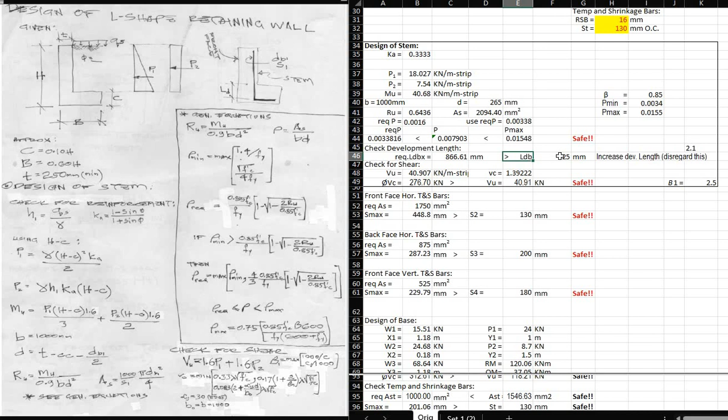That is equal to C minus clear cover. And then, ang required LDB or required development length is ito. So, general equations for required development length.

Pero, ang involved dito na bar diameter is DB1. Ngayon, ito siya, it is among 4 equations. Mapapansin nyo, nakalink siya dito sa diameter of bar 1.

Okay, so the required development length is 866. Ang actual is 325 only. Kaya, fail. Ibig sabihin, etong nakabaon dito sa footing is kulang. Kaya, i-extend mo yan, pag ganyan, para mag-increase lang yung kanyang development length.

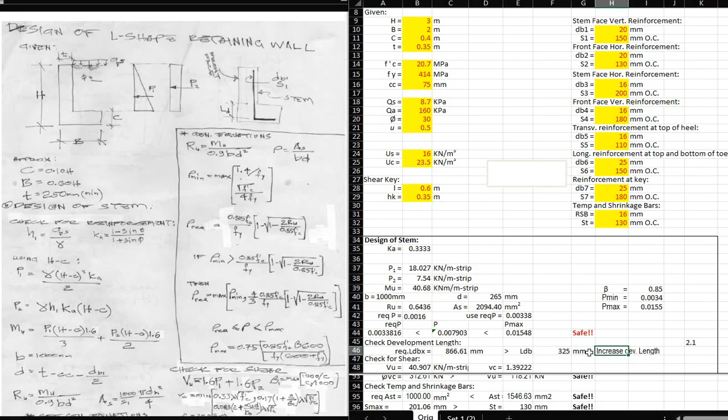Ayan, so increased development length. However, di ko na nilagay dito yung new development length considering yung increase. So, bahala na kayo dyan.

And then next is check for shear. Ngayon, dito sa contact between or the line between the stem and the footing, magkakaroon dyan ng possible shear failure. And then, ang shear force would be obviously P1 plus P2, tapos ang resisting shear force would be phi VC.

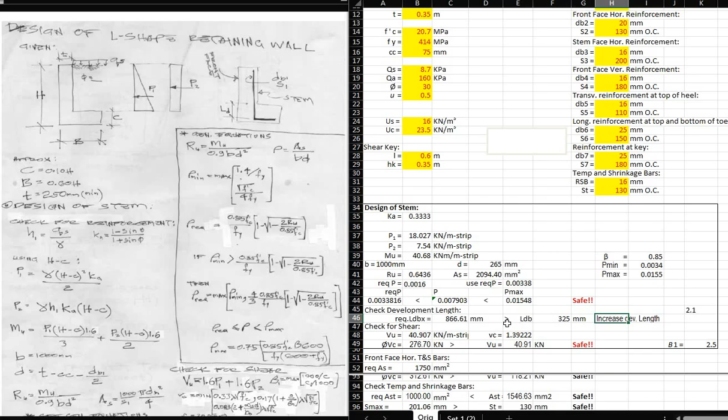Yan yung shear force contributed by the concrete section, which now brings us to this equation. So your shear force is 1.6 times P1 plus 1.6 times P2, which is equal to 40.91 kilonewton.

And then, yung VC natin, ito, which is defined by 1, 2, 3 equations. Okay, so ayan, minimum of 0.33 lambda square root of F prime C, and then 0.17 times this quantity times lambda square root of F prime C. And then, itong beta 1, ito siya.

Beta 1 is the maximum of 1,000 divided by C all over C divided by 1,000, which is 2.5. And then, ang B sub O niya would be 1,000 or meter strip. So we can, and then ang effective depth D niya is nakalink dito sa effective depth D na ginamit natin sa check ng bakal.

Okay, so your phi VC now or shear strength is 0.75 times small VC times 1,000 times D na 265. And your allowable is 276, which is greater than VU. So therefore, it is now safe.

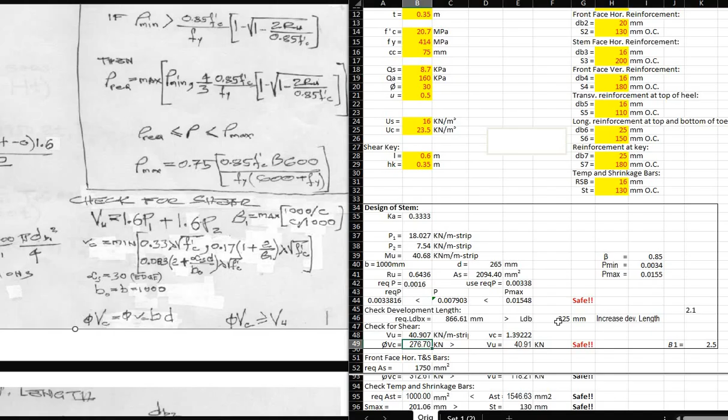After that, punta na tayo sa front horizontal temperature and shrinkage bars. Ito, front face horizontal temperature and shrinkage bars. This is actually front face horizontal reinforcement. Mapapansin nyo, ayan o, S sub 2 and then S sub 2 rin dito.

Actually, ito, hindi siya designed as reinforcement. It is designed as temperature and shrinkage bars. Kasi pag sinabi mong designed as reinforcement, ibig sabihin nun, mag-determine ka ng moment, magde-determine ka ng rho max, rho min support, and so on. Pero ang ginamit lang natin dito ay 0.0025. So this is temperature and shrinkage bars.

However, dito nilagay ko na lang siya na horizontal reinforcement kasi 20 mm ang ginamit natin. And normally, ang temperature and shrinkage bars ay nasa 10 mm tsaka 12 mm lang. Pero since 20 mm na, 16 mm, and then it's okay, nasabihin ko na lang na reinforcement siya.

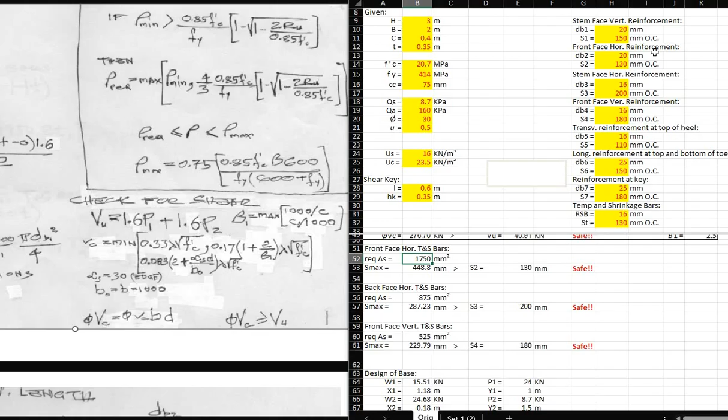So, dito, ang required AS niya ay 2/3 times 0.0025 HT, which is this one. 2 all over 3 times 0.0025 times H times T. And then, ang maximum spacing is based on this AS required.

It is based on 450, 2T, and this equation. Ngayon, ang gagamitin nating diameter of bar dito ay DB2, which is actually ito. Okay? So, that's how you get S max. And then, you compare it with S2 na 130. So, if S sub 2 is lesser than maximum S, then it is safe.

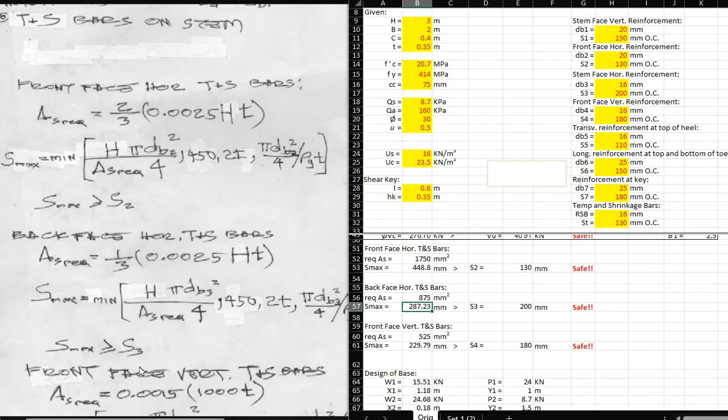After which, dito na tayo ngayon sa stem face horizontal rebars or S3 and DB3. So, back face horizontal temperature and shrinkage bars, your AS required is 1/3 of 0.0025 HT. And then, ang Smax again, the same equation, pero ang gagamitin natin dito ay dB3. Yan, so nakalink ito ngayon, maximum S dito kay dB3.

And then, ang S3 natin ay 200. So, therefore, it is safe again.

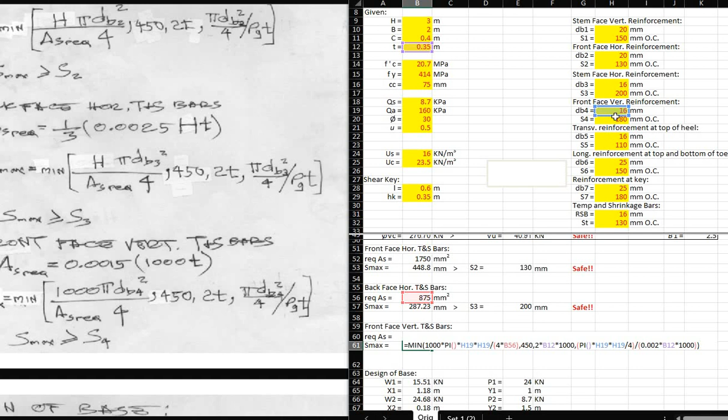And then, finally, dito sa dB4 and S4, yan na. Ang kanyang AS required ay 0.0015 times 1,000 of T. And ang kanyang Smax ay dependent again dito sa AS required, tsaka yung dB4. Okay, and spacing of dB4 is 180 mm.

Next, we now go to design of base. For the design of base, ang kino-consider natin ngayon dito ay yung 3 modes of failure, which is overturning, sliding, tsaka yung bearing. And then yung structural, yung mode of failure number 4, yan yung ginawa natin dito sa design of stem, so forth and so on, and then design of heel, so forth and so on.

Okay, so dito sa design of base, same procedure yung ginawa natin sa gravity retaining wall tsaka sa cantilever retaining wall. Okay, so dito, i-compute natin yung mga gravity forces which are W1, W2, W3, and then W4, tsaka yung mga lateral forces which is P1 and P2.

So, for this W1, here it is. This is B minus T times capital C times unit weight of concrete. And then, X1, that is from the...

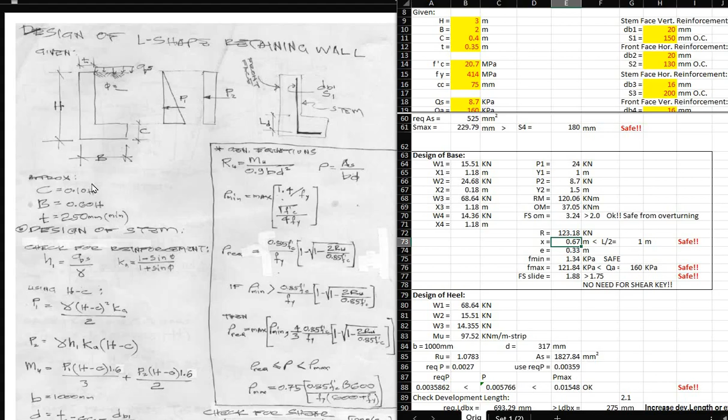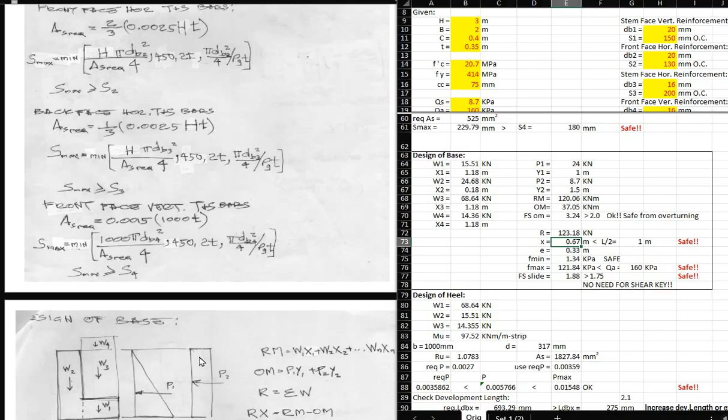That's the middle of the base, okay? It should not exceed this halfway point, otherwise there is a possibility of getting a negative pressure. Okay, so let's go back. So this is x, Rm minus OM divided by the reaction, and it is less than L over 2.

Next, let us now solve for eccentricity E. Eccentricity E is b over 2 minus x, which is 0.33. And then from there, we can solve for the minimum and maximum soil pressure.

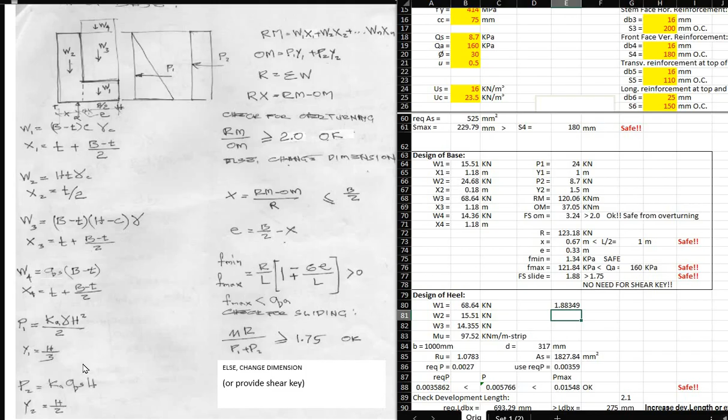Now, if it's less than 1.75, then you have to change the dimension or provide a shear key. And the shear key design is found near the last part.

Okay, so we now proceed to design of heel. For the design of heel, in the figure, this is the heel. Earlier, in the design of base, the toe was that other part.

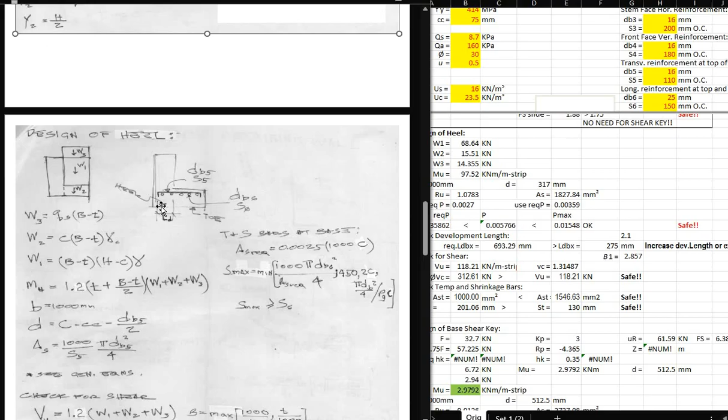Anyway, let's just follow this pattern. So let's call this the heel here. Now, what we need to design here are the rebars. Again, let's design this as a cantilever beam and singly reinforced beam.

So these are the top bars - they will undergo tension due to the uniform load W2, W1, W3. W2 being the self-weight of the footing.

Okay, so let's compute now W1, which is due to the soil. B minus T, that's the width, then H minus C, that's the height, multiplied by unit weight of soil.

Next, we now go to W2, which is the concrete. So that is C, the thickness of the footing, and then B minus T again, same width, then multiplied by the unit weight of concrete, which is this.

And finally, W3, that's the surcharge load multiplied by the width B minus T.

And then our MU - they all share the same lever arm, which is B minus T all over 2 plus this T. Because we take the moment at this part here.

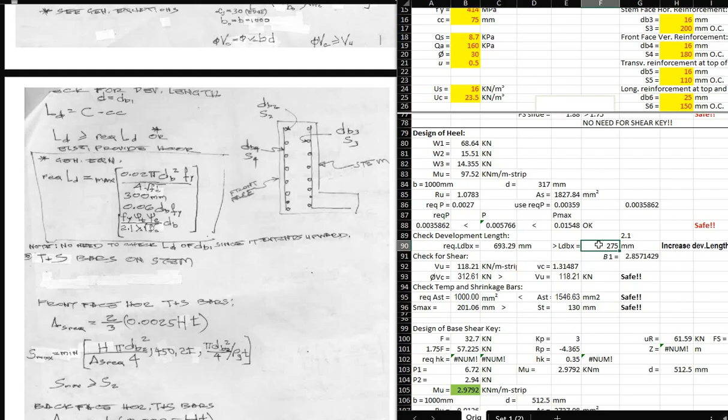So let's check the required LDBX - that's where it's linked. And then the actual development length here is T minus clear cover. This is the development length, T minus clear cover, because this development length is more critical than the one at the bottom of the footing.

Now, if in case this fails, like in this case, the development length fails, then it will comment to increase the development length or extend it up to there.

Okay, so next is we will check for shear. In shearing, this is where the shear will occur. So, actually no - it's down here.

Since the weight is gravity type, or W1, W2, W3, the shear direction is also vertical, going downward. So the VU is 1.2 times W1 plus W2 plus W3, which is this.

And then we also compute the allowable shear stress and the allowable shear force. And our B is 1,000, and D is C minus clear cover minus dB5 all over 2.

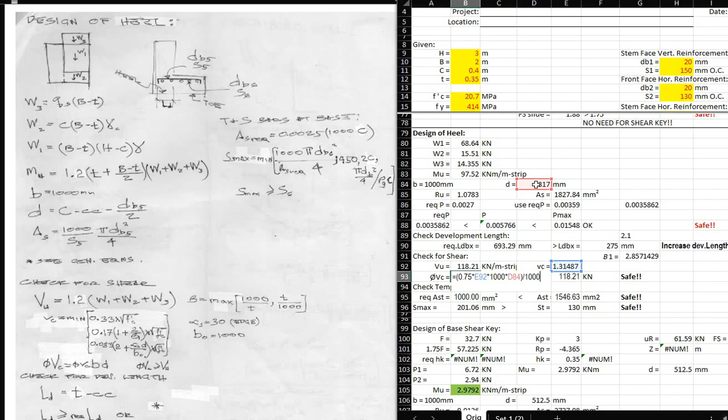Which is, there, it's linked here. And then you compare your allowable shear with your actual shear force VU.

And then after that, we go now to check for temperature and shrinkage bars, which is this portion. So the AS required is 0.0025 times 1,000 C.